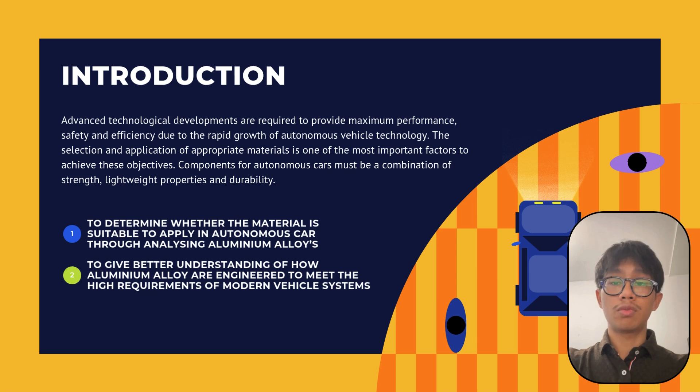So the objective of this study is to determine whether the material is suitable to apply in autonomous vehicles through analyzing aluminium alloys in terms of natural structure, important mechanical and physical properties, microscopic characteristics, processing techniques, and design limitations. The second one is to give better understanding of how aluminium alloys are engineered to meet the high requirements of modern vehicle systems. And next we will move on to the details on the type of materials.

For this study, we have chosen to focus on aluminium alloys, specifically the AlMgSi series, which falls under the 6000 series of aluminium alloys, and I will explain their relevance in autonomous vehicle applications. The 6000 series aluminium alloys are composed mainly of aluminium with magnesium and silicon as the key alloying elements. These elements combine to form magnesium silicide, Mg2Si, which significantly improves the strength of the alloy after heat treatment.

One of the most important reasons for choosing this material is its excellent strength to weight ratio. This property makes it ideal for reducing the overall weight of automotive components without compromising structural integrity. In the context of autonomous vehicles, this weight reduction plays a critical role in enhancing efficiency, handling, and energy performance.

By reducing the weight of key components such as body panels, chassis parts, and crash structures, manufacturers can achieve a significant decrease in fuel consumption or energy usage, especially in electric vehicles. This in turn helps in lowering greenhouse gas emissions, contributing to a more sustainable transportation system.

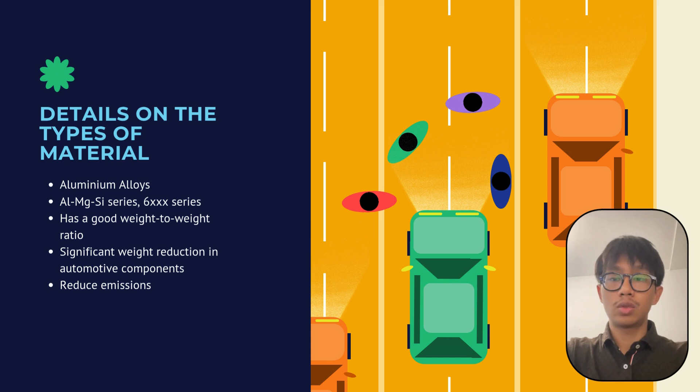So in summary, AlMgSi aluminium alloys from the 6000 series offer a combination of lightweight performance, strength, and environmental benefits, making them a highly effective choice for the future of autonomous vehicles. That is all from me. Next, I'll pass the baton to Muhammad Azib bin Syahidin to present the physical properties of the material.

Thank you, Ahmad Aiman. My name is Muhammad Azib bin Syahidin, and I'm going to talk about the physical properties of aluminium, magnesium, and silicon alloy. The aluminium alloy has good physical properties. For example, the density has a typical value of 2.7 grams per cm cube, which helps to reduce the mass because of a lightweight structure. Next, the melting point ranges around 555 to 650 degrees Celsius, and it is suitable for manufacturing processes such as mold casting and welding.

The thermal conductivity for the aluminium alloy ranges around 150 to 200, and it is good for heat dissipation that can protect electronic systems and battery packs. Next, the specific heat capacity of the aluminium alloy is around 0.9 joule per gram kelvin, and it helps to absorb and withstand heat, which helps to enhance performance.

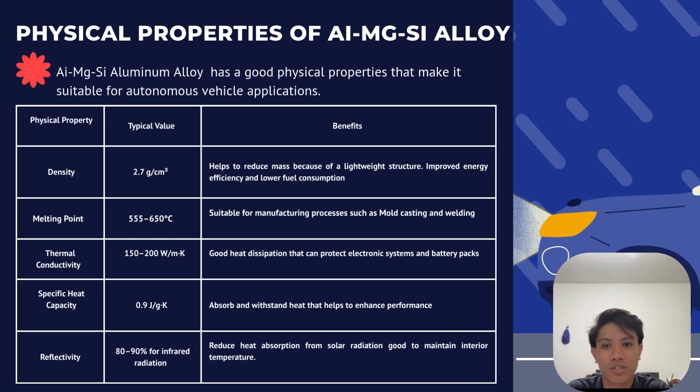And last but not least, the reflectivity for the aluminium alloy is around 80 to 90%, and it helps to reduce heat absorption from solar radiation and is good to maintain interior temperature.

To briefly explain the key properties of the material we are focusing on and why they matter. First, it has a yield strength between 150 to 350 megapascal, which means it can handle impacts or loads without permanently bending. Its tensile strength goes up to 400 megapascals, so it's strong enough to carry heavy or dynamic loads.

The elongation at break is around 10 to 20%, giving it good ductility. This helps the material absorb energy, for example during crashes. Meanwhile, the Young's modulus is about 69 gigapascal, so it's stiff enough for structural use, but not too brittle. Its hardness is between 60 to 90, offering decent protection against wear and abrasion.

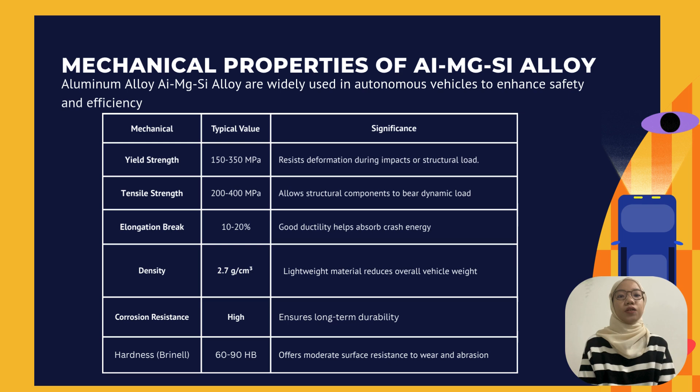Plus, it's quite lightweight with a density of just 2.7 grams per cubic centimeter, which helps reduce the weight of vehicles and boost efficiency. Lastly, it has high corrosion resistance, meaning it lasts longer, even in harsh environments.

Let me now briefly talk about the microstructure of aluminium, magnesium, and silicon alloys. The main part of the alloy is the aluminium matrix, also known as the alpha phase. This gives the material its lightweight nature and good flexibility. Next, we have magnesium silicide precipitates. These tiny particles help strengthen the material through a process called age hardening, which improves its overall hardness and strength over time.

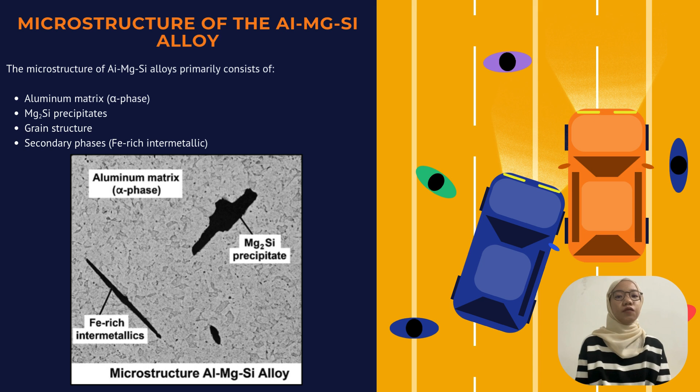Then there's the grain structure, which is carefully controlled using heat treatment and mechanical processes. This balance is important to achieve both strength and toughness. Lastly, there are secondary phases, especially those with iron. These ferrum-rich intermetallics often appear as needle-like or plate-like shapes. Although they are usually present in small amounts, we try to reduce them as much as possible because they can lower the ductility of the material. So overall, the microstructure is carefully designed to give a combination of lightness, strength, and also durability.

The aluminium alloy will undergo a few manufacturing processes. Firstly, it will undergo extrusion. The metal is forced through a die to create long constant cross-section profiles. Next, it will undergo rolling processes. In this stage, the aluminium alloy will be rolled to produce sheets and plates. Lastly, it will undergo stamping or press forming. The sheets from the rolling process will be cut and formed into desired shapes using presses and dies.

For the applications, there are a few parts where aluminium is utilized in automotive applications. First, it will be utilized in body panels, which are hoods, doors, trunk lids, fenders, floor pans, and pillars. Next, it will also be used in chassis and structural components such as subframes, suspension arms, bumper beams, axle components, and frame rails. Lastly, the aluminium alloy will also be utilized in radiators, condensers, intercoolers, and also battery cooling plates for electric vehicles.

To optimize aluminium alloys for automotive applications, future development should focus on creating next-generation alloy compositions that maximize and enhance the strength-formability balance, allowing the production of complex, strong, lightweight structures with improved capability. Simultaneously, efforts are required to optimize advanced joining technologies, including improved friction stir welding, to ensure seamless and durable bonding of aluminium alloy, to reduce strength loss in heat-affected zones and enhance overall structural integrity.

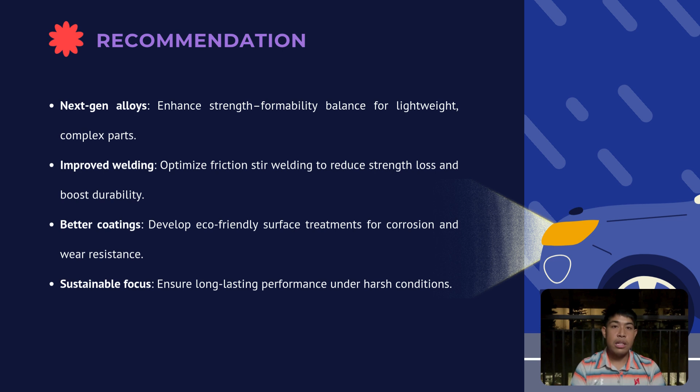Moreover, innovations in durable and eco-friendly surface treatments are essential to enhance corrosion and wear resistance, increasing components' longevity and preserving quality under extreme automotive conditions.

Thank you, Farid. As a conclusion, choosing the right material is important for safety, efficiency, and durability. AlMgSi aluminum alloy is recommended for its excellent properties as it offers a good balance of strength, corrosion resistance, and light weight.